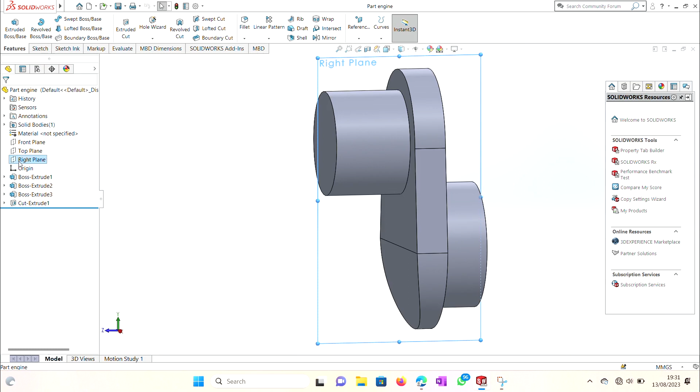Free your imagination. In this video, as usual, we will continue our previous video, continuing to draw the crankshaft for the car engine.

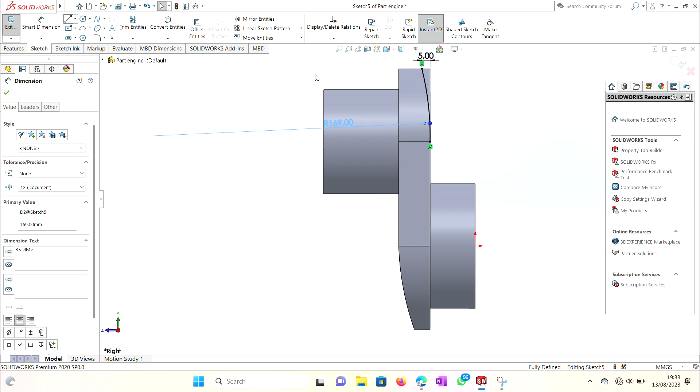We will delete an edge, like that. Okay, I don't know what to say, but at least see what I will do. It is the perfect way to learn.

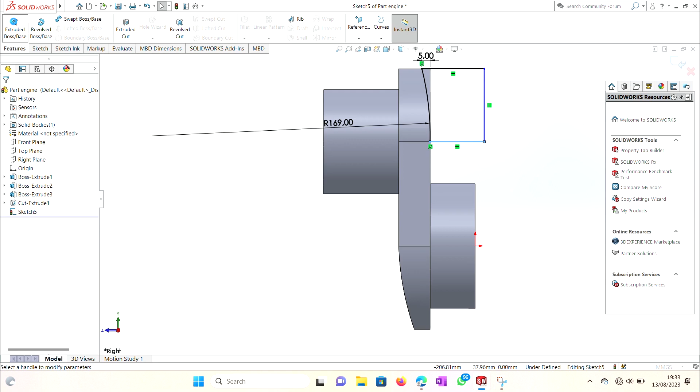It's the perfect way to learn, and we make it extrude cut, midpoint, midplane, and it's up to you to pick either right or left.

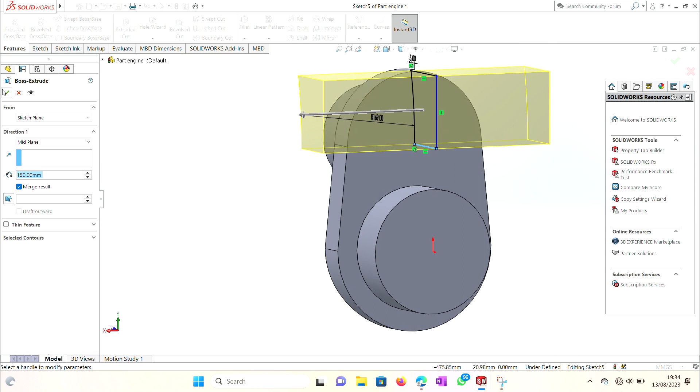Okay, we got this. We have done the extrude cut, and then what we will do is make a fillet to make it more beautiful and smooth, similar to the real one.

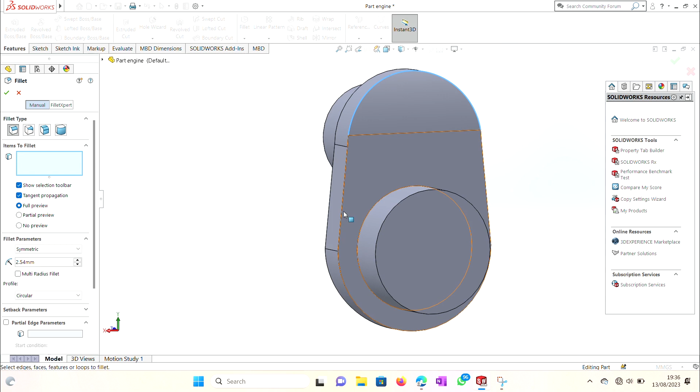Guess we will make a design for this. To be a designer, we not only take attention to the function, but we also have to care about the aesthetic feeling.

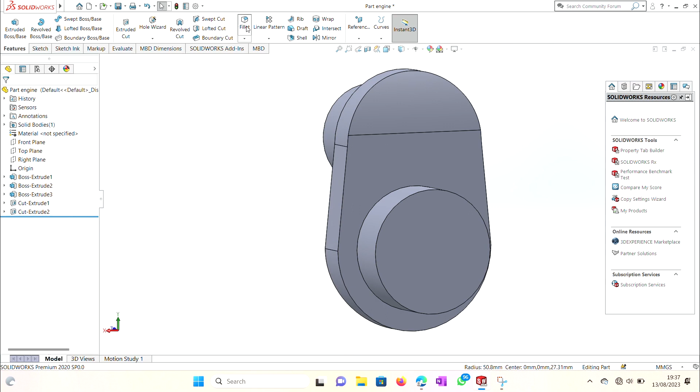Let's start to... it may take too much time, but it's not hard as you see. Yeah, like this and like this.

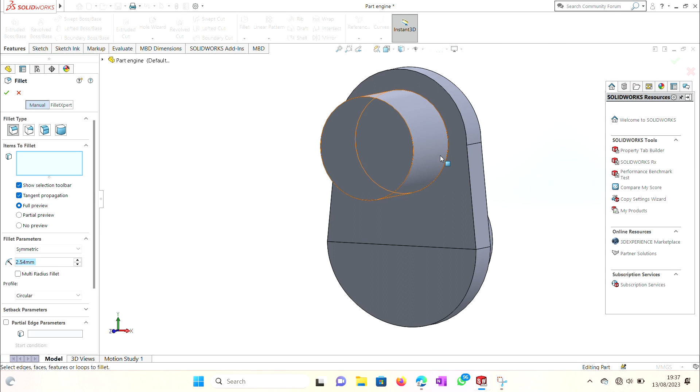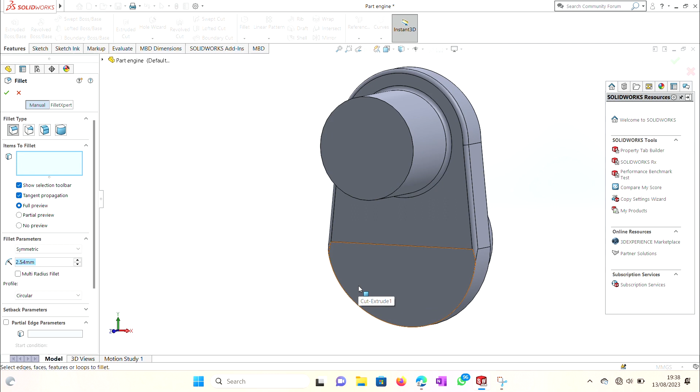By the way, guys, don't forget to fillet 2.54 for the radius of the fillet that you make. 2.54.

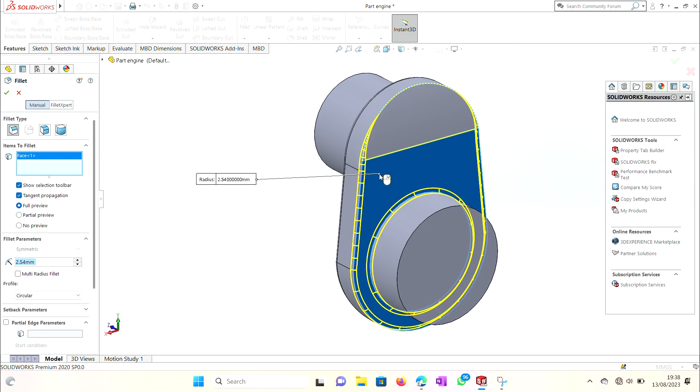Okay, it's done. Then for the fillet...

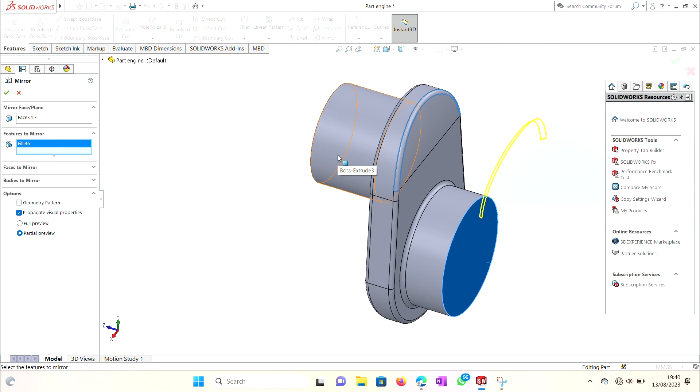We make a mirror object for this part. Mirror is like when you see yourself in a mirror. It is the reverse direction, so you can see yourself in front of the mirror.